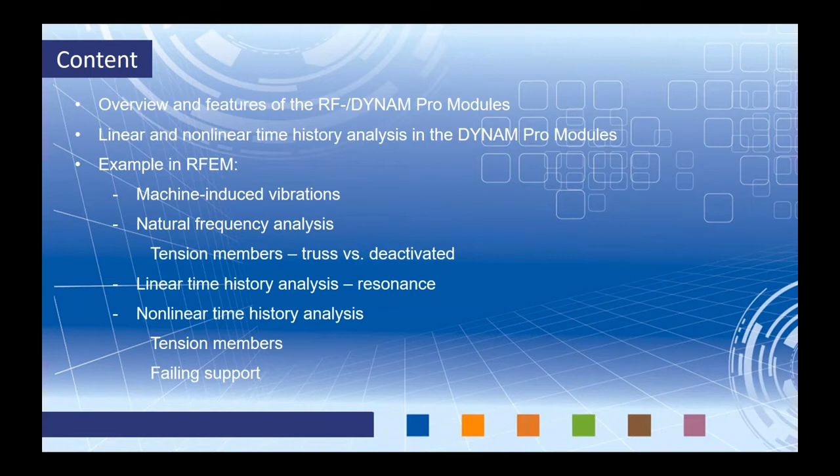So regarding the dynamic add-on modules in RFEM, RFEM is our main program. This is where we're going to fully model the structure. We can load it with some various static loading and run an analysis. But anything to do with dynamics, whether that's a natural vibration, forced vibrations, or seismic analysis, does require one of our dynamic add-on modules. So the first is RF-DYNAM Pro Natural Vibration.

So this is going to run an eigenvalue analysis that allows us to find the natural frequency and mode shapes of our structure. Now this is a prerequisite in order to run any of the additional add-on modules that we have for dynamic analysis. The second is RF-DYNAM Pro Forced Vibrations.

Now this allows us to run a linear time history analysis, which is what we'll be taking a look at today. We can also run a multimodal multi-point response spectrum analysis. We won't be touching on this point today, however.

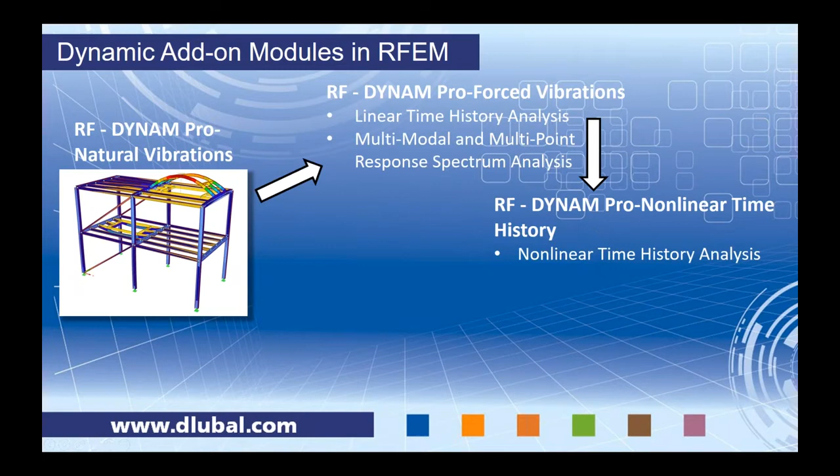We only see tension forces within that member. So what happens is when we have any type of compression within the member, it completely fails. And yet when we reintroduce tension forces within the same member, the member is reactivated, and so on throughout the entire course of the time analysis.

The last module that we have is RF-DYNAM Pro Equivalent Loads. This is a multimodal response spectrum analysis with the generation of equivalent static forces. Now, I did an entire webinar focused on only this module, so I would refer you to our YouTube channel if you're more interested to see this, as we won't have time to get into it today.

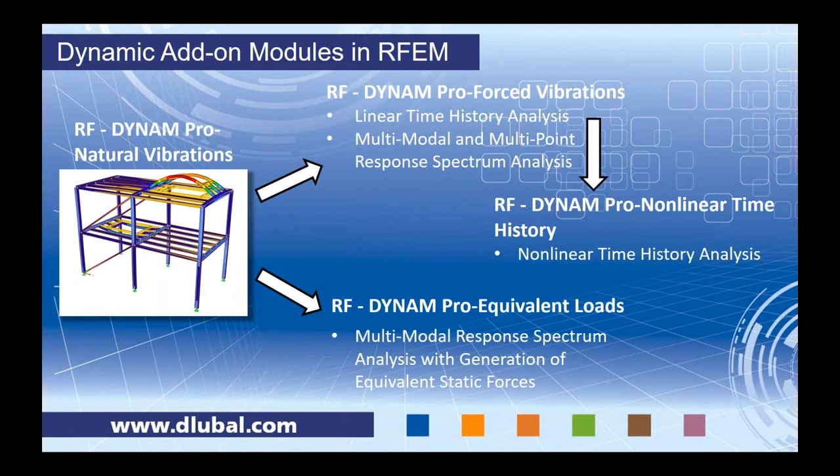So now looking at RF-DYNAM Pro natural vibrations in a little bit more detail. Again, this is an eigenvalue analysis that allows us to view the frequency and mode shapes of our structure. We can directly import masses from load cases, load combinations from RFEM, or we can manually apply masses within the module itself, and eventually we want to create mass combinations. We do have the diagonal, consistent, or unit mass matrix available here.

And again, this is a linear analysis, so something like a tension-only member is replaced with a truss member. Now, there's some other nonlinearities that may be simply ignored as well, such as a failing support. However, we can import initial conditions such as stiffness modifications, axial forces, failing or deactivated members, and that's actually what we'll be taking a look at today. We'll import the failed tension members of our structure to see how the frequency and mode shapes change due to those deactivations.

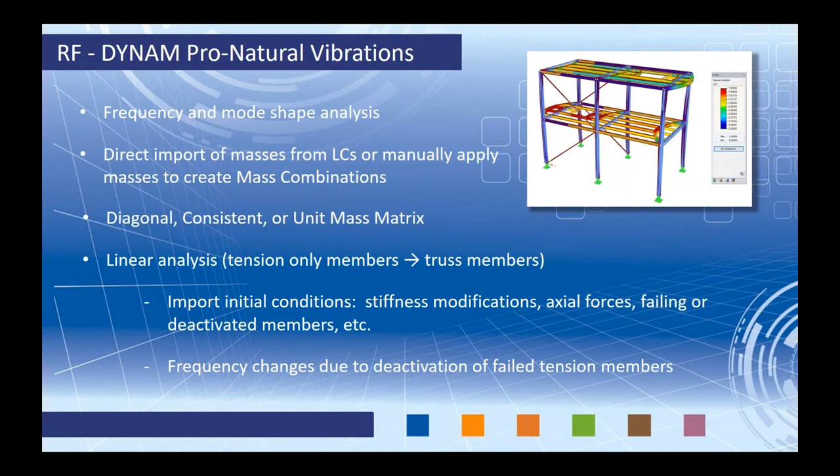So as I mentioned before, with time history analysis, we have both the linear and nonlinear options available. Now, as far as the linear time history analysis, this is available in DYNAM Pro Forced Vibrations. We have two different solvers, the modal analysis solver and the implicit Newmark solver. I'll get much more into detail on these solvers in just a minute, but as an overview, the linear analysis neglects structural and geometric nonlinearities. This does run a first order analysis and assumes small deformations.

Now, again, nonlinearities in the model are replaced, as I've already mentioned, with tension-only members, but also with compression-only members, with cables. They're all replaced by truss members. And by the way, a truss member in RFEM is nothing more than a typical beam element that can take both tension and compression, where all we've done is release the moment releases. Now, other nonlinearities may be completely ignored, such as support conditions.

As far as the nonlinear analysis, this is available with the module extension RF-DYNAM Pro Nonlinear Time History. So there are two solvers available here as well, the Explicit Solver and the Implicit Newmark Solver. In RFEM, this is going to assume large deformation analysis, and all nonlinearities that are defined within the model that we define within RFEM can be considered within the time history analysis.

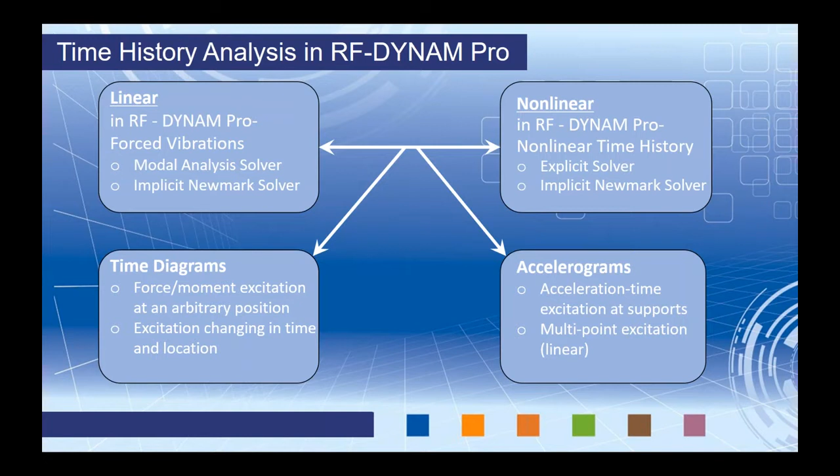So with time diagrams, this is a force or moment excitation at an arbitrary position. We define our time diagrams with tabulated values, which can be imported in directly from Microsoft Excel, for example. It can be a periodic function, or it can be a direct input of a function within the edit field. Load cases define the location and the excitation of how this load will be applied according to the time diagram. So for example, we would apply loads within these load cases, nodal loads, member loads, surface loads, and many other options to determine where exactly this excitation will take place. The combination of several independent excitations is possible, and the excitation can also vary over time and position.

Now, as far as accelerograms, this can be taken into consideration with time diagrams that can be imported in from a library of earthquake recordings, which we have available directly within the module, or it can be user-defined. Now, the difference here is that this is an excitation at the supports. A multi-point option is available as well for the linear analysis only.

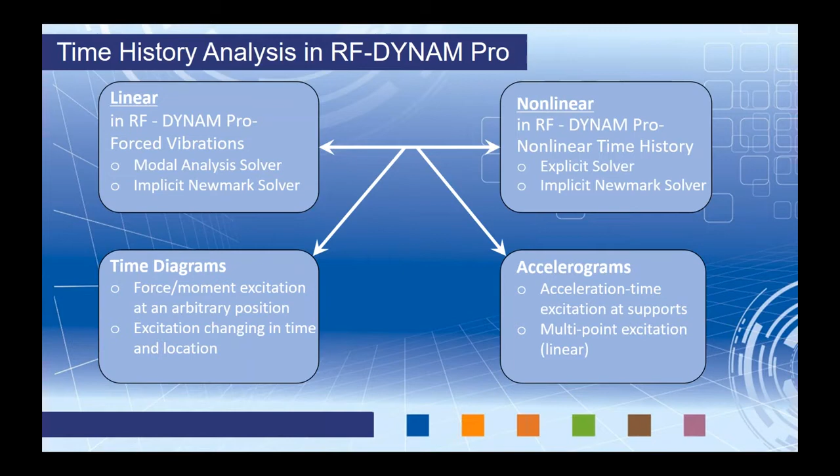Now, regardless if you're running a time diagram or an accelerogram, the display of results are both available on a time course monitor, and this is certainly something that we'll be taking a look at quite a bit today. We can export the results into load cases for single time steps, so you can actually see the response of your structure at each individual time step back in RFEM, or we can export out a result combination for the result envelope.

So to give you a little bit more detail on the solvers, we'll begin with the first linear solver, which is the modal analysis. This is a decoupled system based on the natural vibration case. Therefore, a certain number of eigenvalues are required to ensure accuracy. So if you determine this natural vibration case, if you set the eigenvalues to something that's far too low, then your results are not going to be accurate when it comes to the time history analysis utilizing the modal analysis solver. This is a multi-degree of freedom system transformed into many single degree of freedom systems. We have more information on this in our manual, in our literature, and some verification problems available on our website if you're interested to see exactly how this works.

The mass matrix and stiffness modification are taken directly from the natural vibration case. Now we can consider structural damping, and in particular Lehr's damping.

Lehr's damping, as engineers, we're probably most familiar with this. This is just a damping ratio that we'd like to achieve for our structure. Now you can set different Lehr's damping values for the different eigenvalues from the natural vibration case.

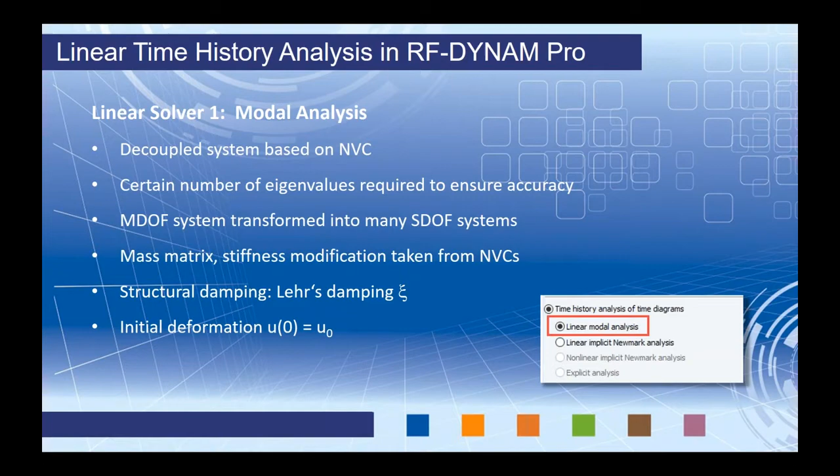And unlike any of the other solvers that we'll be taking a look at today, you also can define an initial deformation.

The second linear solver is the implicit Newmark solver. This is a direct time step integration, therefore eigenvalues are not even required. There's absolutely no assignment of the natural vibration case. You don't even have to run a natural vibration analysis in order to move forward with this particular solver.

In turn, that means that the time step is now incredibly important for the accuracy of the results. If you set a time step that is much too large, then your results from this linear analysis will be incorrect. Now, there is a fine line. If you're setting a time step that's really, really small, well, that's going to take quite a while to solve within the program, when in reality your results might not change much if you were to set something slightly larger.

So we do have some recommendations as far as a time step within the program, and you can see that listed here. Delta t is less than or equal to 1 over 20 times the frequency. Now, the frequency in this equation is the largest frequency from either the natural vibration of the structure or of the excitation frequency.

Both the diagonal and consistent mass matrix are available here, and stiffness modifications or initial deformations cannot be considered. We can also consider structural damping though, however this is in reference to the Rayleigh coefficients with alpha and beta. So we need to somehow convert Lehr's damping into the Rayleigh coefficients, which we'll be taking a look at today with our example.

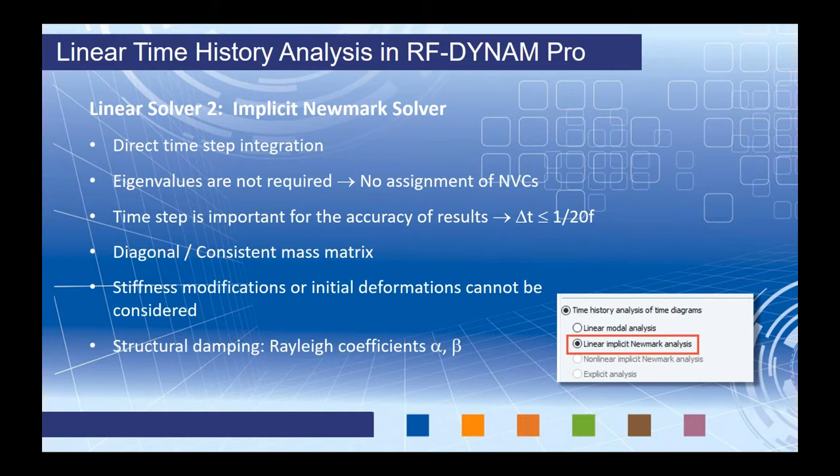So now moving on to nonlinear time history analysis. Again, this is something new that we just recently added. And now we have the ability to define two different solvers to utilize, either the explicit analysis or nonlinear implicit Newmark analysis. Well, with either one of these solvers, nonlinearities within RFEM are now considered.

So the question might be, well, what exactly are these nonlinearities that we can consider from RFEM? Well, here is a nice screenshot showing you the global settings within RFEM where you can activate or deactivate some of those nonlinearities. So as I already mentioned, the member type, tension only, compression only cables, but we also have support nonlinearities. We have member end releases that we can define nonlinearities such as tearing, yielding, friction, things like that.

We also have contact solids and member material nonlinearity, so a plastic analysis for steel, isotropic thermal elastic material models. This can all now be considered with a time history analysis. So the large strain deformation analysis is assumed here, and the direct time step integration is utilized. Therefore, eigenvalues and natural vibration cases are not considered. So again, we don't even have to run a natural vibration case.

However, it's always important to study your structure in order to determine if resonance is going to be an issue. So in our example today, we'll still move forward with a natural vibration case as well.

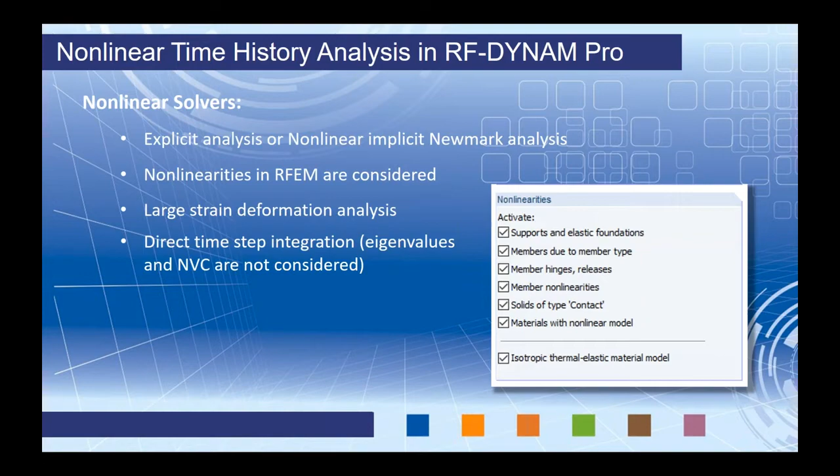Looking at the first nonlinear solver in a little bit more detail, well, this is an explicit analysis solver. This is best for short duration excitations such as an impulse, an explosion, or rapidly changing nonlinearities. Now, in order to get a conditionally stable model, your time step, delta t, must be less than or equal to delta t stable.

Well, the question is, what is delta T stable? And you can see here that I've actually listed this formula here. Now, the program can automatically determine what delta T stable is, so by all means you can use the automatic time step within the explicit analysis solver. The equation is 2 over omega max plus the square root involving Lehr's damping ratios.

Now, remember that I said with either one of these solvers, you do not need a natural vibration case. So without the natural vibration analysis, how do we determine what omega max is? Well, we don't. In practice, delta T stable will be utilized as this equation here, LE over C sub D, where LE is our finite element length, C sub D is the square root of Young's modulus over the density, or the dilation wave speed for linear elastic material. So this is how we estimate what delta T stable will be without the natural vibration analysis.

Now, the diagonal mass matrix is only available here with the explicit analysis. We can consider structural damping here with Rayleigh coefficients, but the limitation is only the alpha coefficient can be set. The beta is always equal to 0 when we're utilizing an explicit analysis.

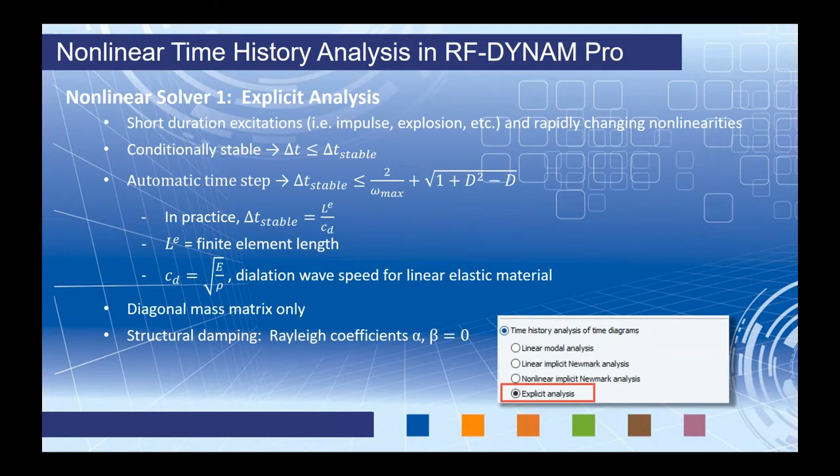The second nonlinear solver is nonlinear implicit Newmark analysis. This provides an unconditionally stable model or analysis independent of the time step. So unlike the previous solver, we'll always get a stable analysis.

However, the time step determines the accuracy of the results. If you're setting a time step that is much too large, your results are going to be inaccurate. So a time step convergence study should be run to determine, as we continue to decrease these time steps, are my results significantly changing?

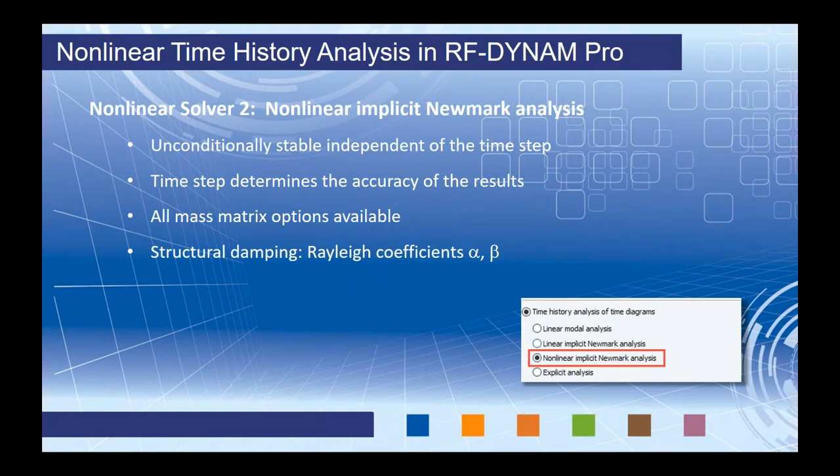All mass matrix options are available with this solver, and structural damping can be considered with the Rayleigh coefficients, both alpha and beta. Okay, so that is all for the theory to begin with. So let's jump into the model.

As you can see here, I went ahead for the sake of time and modeled a steel structure. We have some W8 by 35s for our columns, W8 by 15s for our beams, and you'll notice that I have lateral bracing members here.

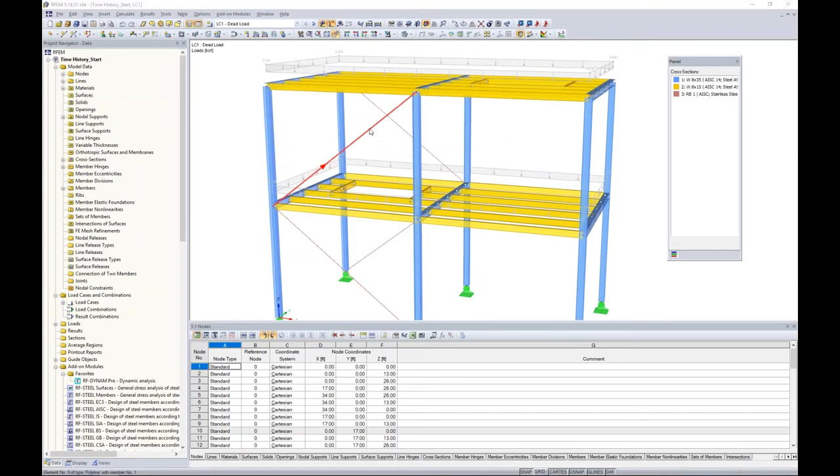Well, these are my tension-only members. I can double-click here and see the member type is set to tension only, and again, we have some other nonlinearities like compression, cable members, and so forth.

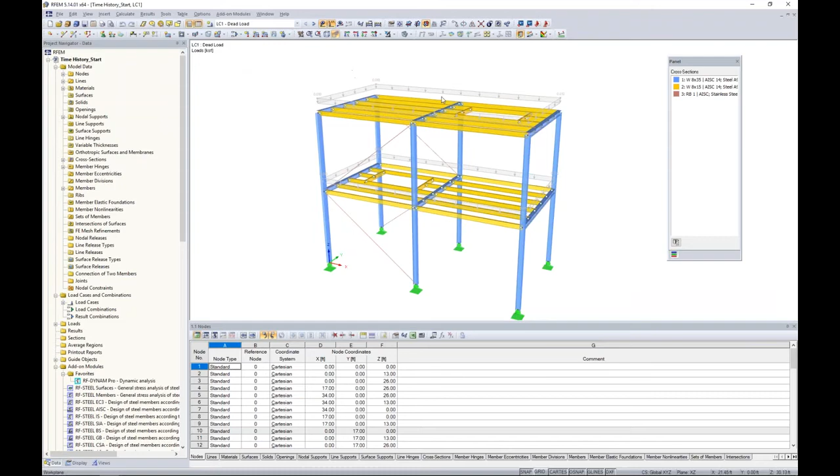I have added a few load cases in here. Now, the first load case is dead load. This is just within our main program, RFEM, and this dead load includes self-weight already, and I've applied a couple area loads. Now, I can right-click to display these area loads separately.

What you can see here is I've excluded some of the transverse beams. They're only applied to members in the global X direction based on their tributary area. So just a typical dead load.

Now, my second load case is the dead load from my machines. This is some type of industrial structure, and we know that there's going to be a couple machines placed on the structure around where these openings are located. Now, these machines inevitably have a dead load themselves, so we need to apply that weight or that force to the RFEM model.

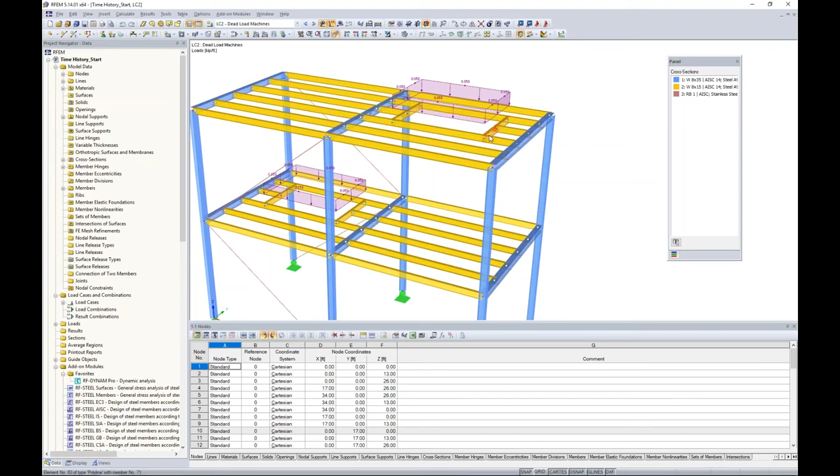So all I've done is I've taken the total weight of the machines, the mass, and then I've divided by the total length here around the opening, which is about 33 feet, in order to get a member load for both the top level and the second level.

So those are really the only two load cases I want to consider for now for my natural vibration analysis. In reality, we could continue on adding snow loads, live loads, and so forth, but we'll just go ahead and move forward with our two dead loads.

So now we want to launch the RF-DYNAM Pro modules. We can access the DYNAM Pro modules in the project navigator over here, and you can see here is our very long list of add-on modules. We can also access them with the drop-down box up here at the top under add-on modules. They're categorized a little bit more clear.

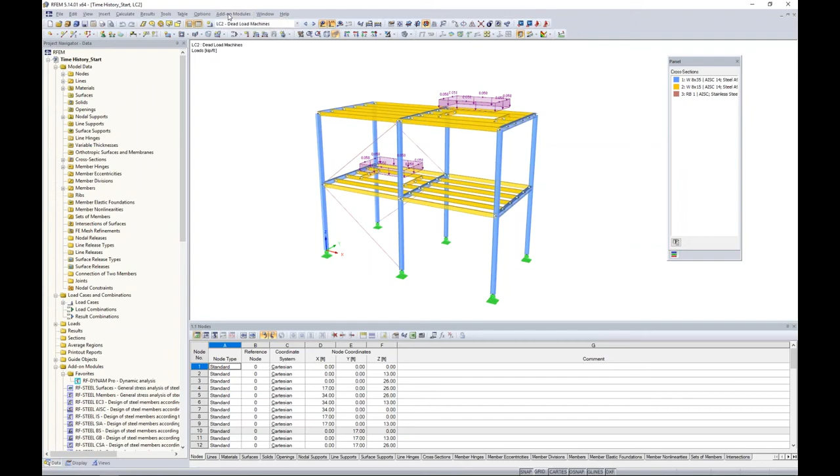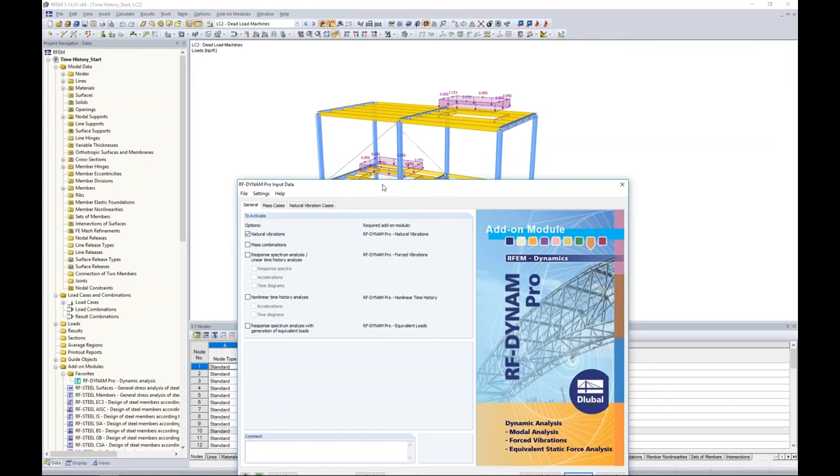So launching RF-DYNAM Pro dynamic analysis, as you can see, all 4 of our DYNAM modules are all located within this single dialog box. Now, we don't have to worry about remodeling any of our members, our materials, our loads, our support conditions. Everything is taken into this dialog box. All that we're doing is specifying a little bit more input that relates to the dynamic analysis alone.

So we can activate or deactivate any one of the modules here. I'm going to leave the natural vibrations activated for now, and I'm also going to activate the mass combinations, which brings up an additional tab. Then I just simply work from left to right.

So my mass cases. I want to create my first mass case, and we'll call this one dead load of the structure. I want to import the masses, but the first thing I want to do is uncheck the self-weight. If I leave the self-weight checked here, I will account for self-weight twice because I've already accounted for it in my first load case back in RFEM. Instead, I'm going to import in that first load case with the area load and the self-weight already considered.

Now, we can manually define additional masses at nodes, lines, members, or surfaces if we had them defined in the model here. So it doesn't necessarily always have to be from a load case or load combination within RFEM.

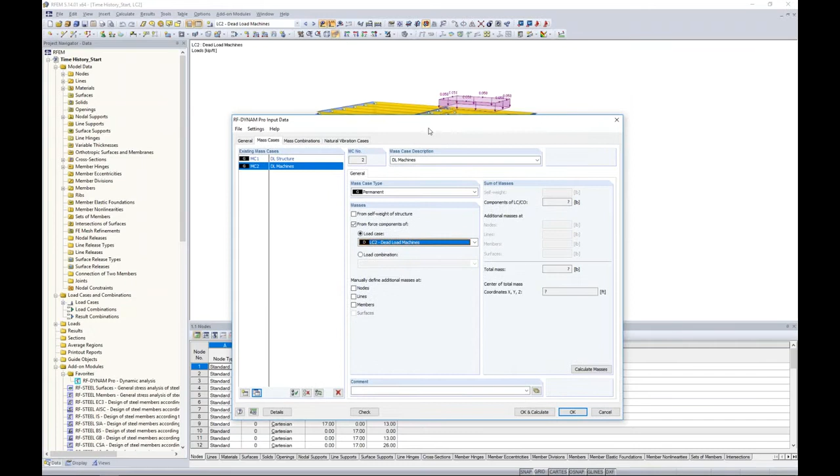So I can make a copy of this mass case, and this time we'll rename it to the dead load of the machines, and we'll import from our second load case the dead load of the machines, which we can see here in the background in RFEM. That's all I want to do for defining my mass cases.

Moving on to mass combinations, this is where I'm going to combine my mass cases to create my first mass combination. You can create as many combinations here as you'd like. This is nice so that if we want to study how the structure behaves based on one mass combination versus another, deactivating or activating other masses, you can do so by creating multiple mass combinations down here. The mass case factor can be adjusted here—right now it's set at 1, or 100% of that mass acting. You can always manually type that in or use the drop down. We only want one mass combination for our case today, so we'll continue to move on.

Now the natural vibration case. The first case, remember from the PowerPoint, I said we're going to run two different cases. The first is where these tension-only members are going to be replaced by a truss member. So we would like to set the lowest number of eigenvalues to calculate to 10. The scaling of mode shapes we'll leave as the default option here.

Under the calculation parameters, well, we just created this mass combination, so we certainly want to utilize it. The type of mass matrix—you can see here the diagonal, the consistent, or unit are all available. We'll utilize the diagonal matrix in translation and rotation, so now you can see all 6 degrees of freedom are activated here.

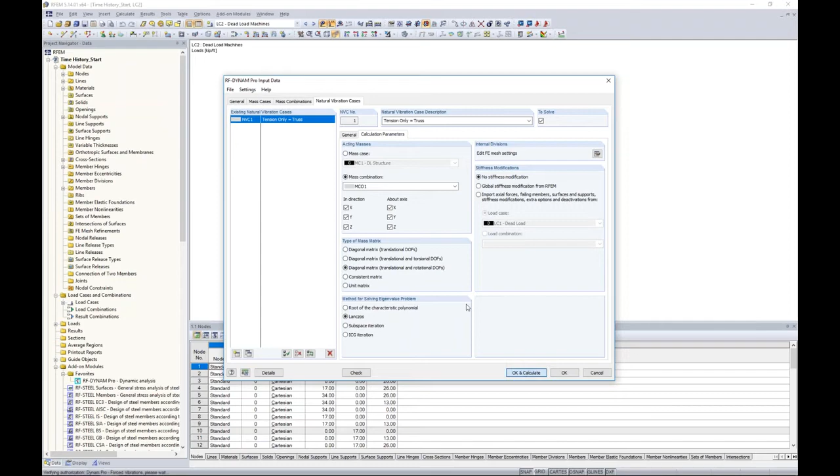So the program will quickly cycle through this. It will dump us back into RFEM. Now realistically we're still in this add-on module—you can see it within my drop-down box here, RF-DYNAM Pro. I'm just viewing my dynamic results graphically and within this table back in RFEM.

According to my table here, table number 5, these are my dynamic results. I can see my natural vibration case is set to the table right now, and I have my 10 different mode shapes. So I can cycle through these mode shapes to view how the structure is behaving based on the different eigenvalue modes. Now, probably the most important table that we immediately want to jump to is the effective modal mass factors. This is going to show me my mass participation in the global X, Y, and Z directions, and it's also going to tell me what my dominant modes are.

So if we take a look at mode shape number 1, this looks to be the dominant mode shape in the Y direction—I have the most mass participation at 64% here. Moving on down the table, it looks like mode shape number 6, with 86% mass participation in the global X direction, would be my other dominant mode.

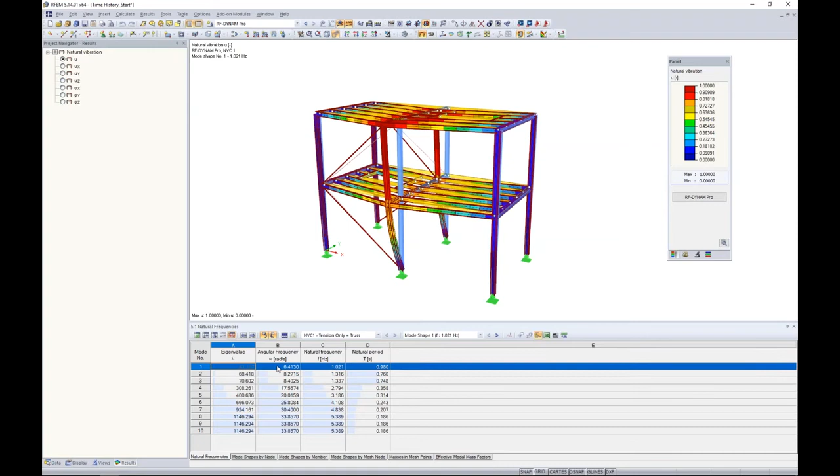With those two dominant modes in mind, we're going to jump back to the natural frequencies tab here to take a look at what the angular frequency and natural frequency are. According to mode shape number 1, angular frequency 6.4, natural frequency 1.02. Moving a little further down to mode shape 6, the angular frequency is 25.8, the natural frequency is 4.1. These are two really important numbers I want you to keep in mind: 25.8 and 4.1.

So this is the natural frequency analysis of my structure. I know that I'm going to be placing these machines on this structure—they're going to be rotating, inducing some external excitations onto the structure, and they also will have an angular frequency and frequency in hertz that will be applied to the structure. So the question is, do we need to worry about resonance? What is the frequency of these machines? Do they coincide with the frequency of my structure? Am I going to get deflections that ultimately may cause the structure to fail because those two frequencies are so close together? That probably tells us that we want to run a time history analysis.

So here, back to the PowerPoint, let's take a look at some calculations for these machine-induced vibrations.

So I was given the information that I have 2 rotating machines at 246 rotations per minute. The mass of the machines is 2,000 pounds. Of that, the mass of the rotors is 700 pounds, operating at an eccentricity of 0.75 inches.

In order to find the excitation frequency, all we need to do is take 246 rotations per minute divided by 60 seconds, and we get 4.1 hertz. The angular frequency is 2 pi times the excitation frequency, which gives us 25.76.

Now, remember back to my natural vibration analysis, mode shape 6, we remember frequencies that line up almost identical to these two of our machines. So that immediately tells me I could have a serious problem here with my structural design in the case of resonance.

So moving forward with the time history analysis then, I want to turn these frequencies into a centrifugal force. Now, the force is going to be applied to my structure as a static load because this is what's going to tell the program this is the location that my excitation is going to take place that I'll eventually apply to my time history analysis. But we first need to convert these frequencies to an actual force.

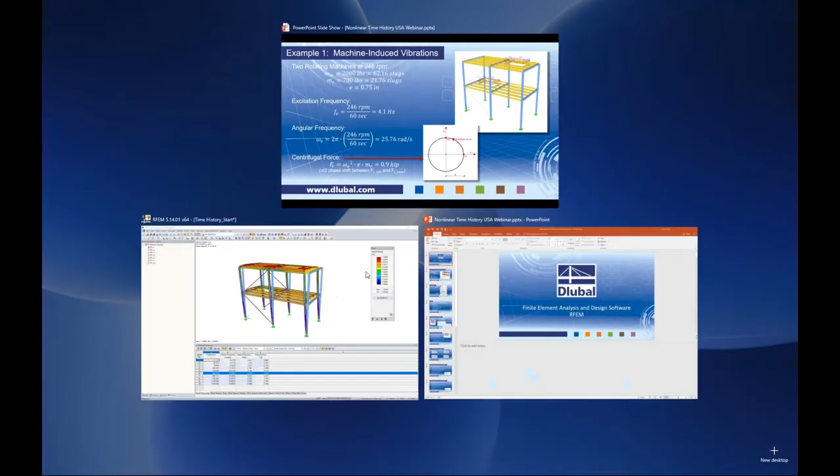So jumping back to the model here, we would like to move forward with our time history analysis. Within RFEM, I've already created a couple different load cases. Here is my centrifugal force in the vertical direction. This is a completely empty load case right now.

So what I'd like to do is take that 0.9 kips and apply it in the vertical direction where these machines will be placed, applying the excitation to our structure. We'll do this with a new member load. I'm going to take the 0.9 kips, divide by the total length here of my opening, which is about 33 feet, to give me my magnitude of negative 0.028 kips per foot. And I want to apply it in the global Z direction.

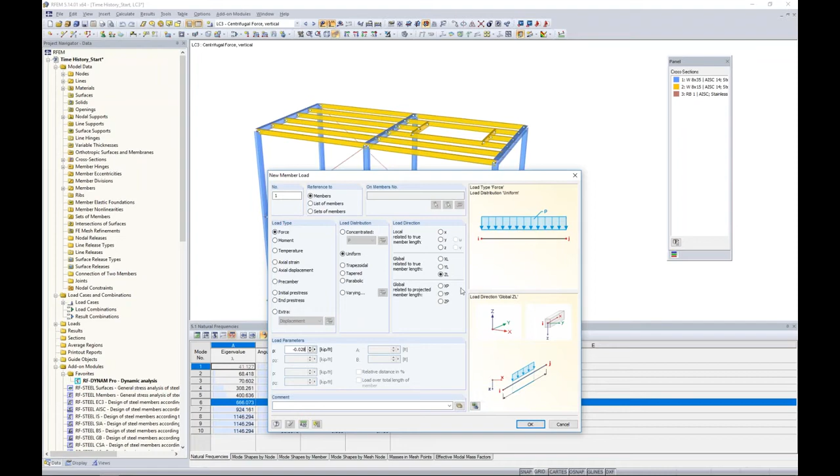I click OK. I can zoom in here and simply click on the members where those machines will be placed, and I have my first vertical load applied. Now I want to do the exact same thing down here on my lower level. I just click at the locations where the second machine will be placed, and I have my second vertical load.

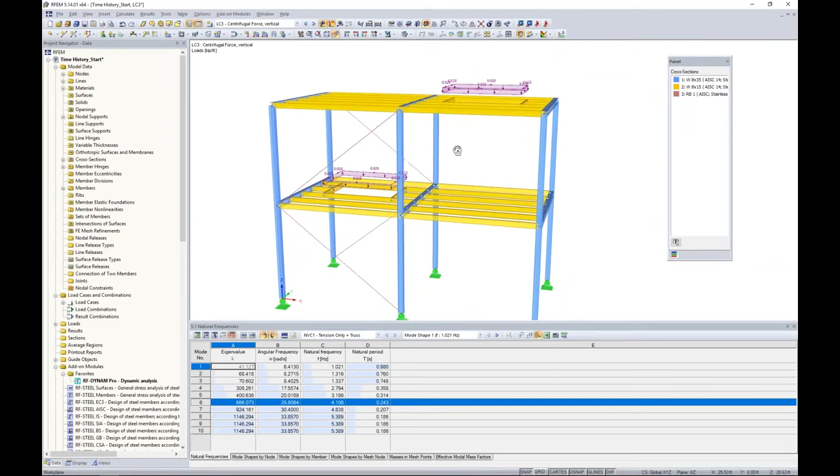So again, we created this fourth load case, the centrifugal force, in the horizontal direction. Exact same concept here. I apply a new member load. I keep the magnitude the same. The only thing I want to change is the load direction in the global X.

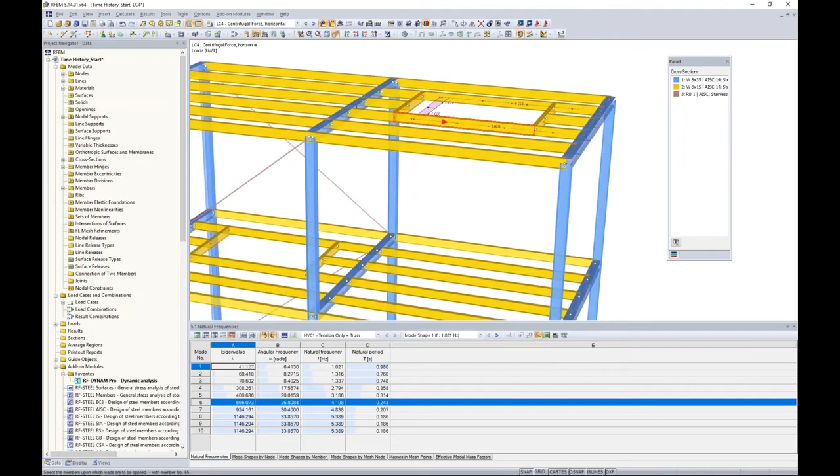I click OK. I zoom in here to where my opening occurs. I click on my members to now create that centrifugal force in the horizontal direction only. I do the same thing on the bottom level to every member that's applied to that opening.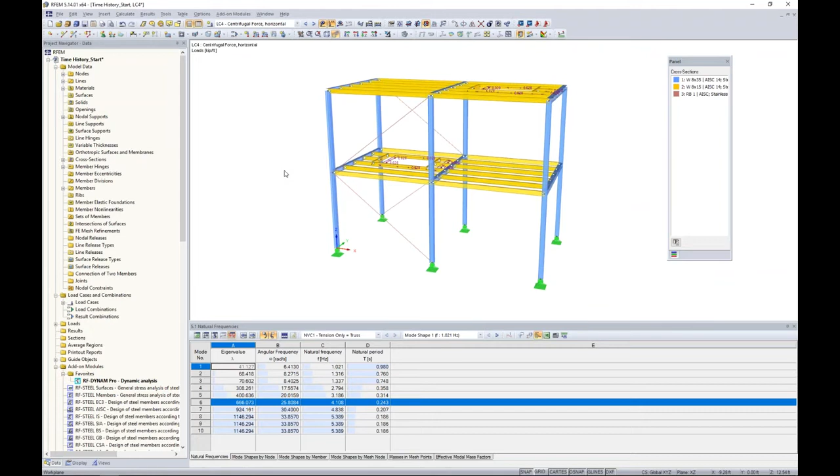So now I just have these basic static loads within RFEM. That's all I've done here, but we actually need to provide some type of time diagrams to tell the program how this force is going to vary over time.

With this, we'll launch the RF-DYNAM Pro module again. So here we can now activate RF-DYNAM Pro forced vibrations for a linear time history analysis according to a time diagram. Now you can see I have a couple different tabs available up here at the top.

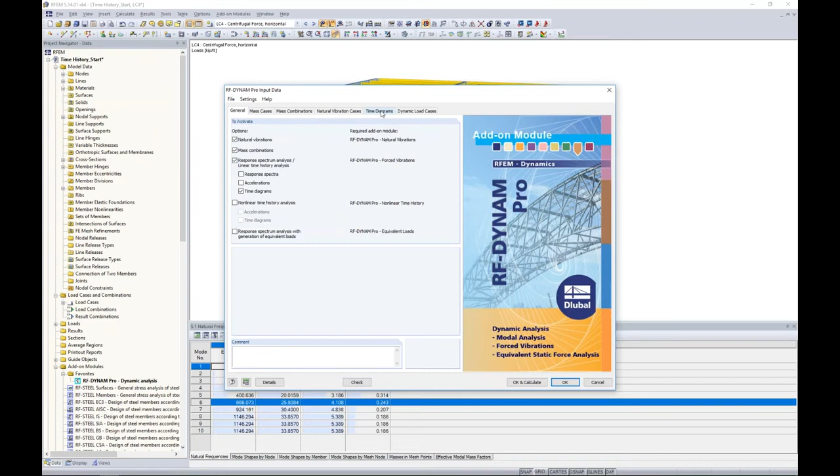So taking a look at our time diagrams, we want to create the first time diagram description, and this will be the vertical component. As I mentioned in the PowerPoint, we can import transient information from Microsoft Excel, for example. We can enter in a periodic function, which we'll be utilizing today, or you can type in a direct function here.

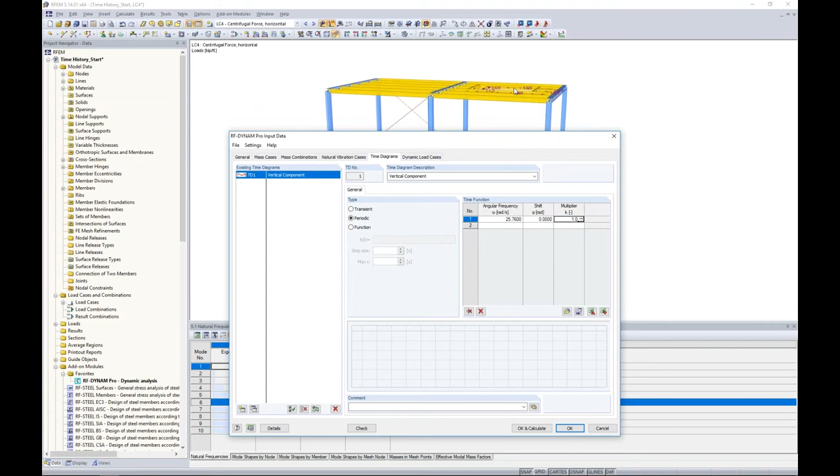As far as the periodic function, remember from the PowerPoint, we already solved for what the angular frequency of our machine is. This is going to be 25.76. The shift is going to be 0. The multiplier is going to be 1.0. Now the multiplier is 1.0 because I've already defined the correct magnitude for my machines back in the load cases within RFEM.

So now I can see here my sine function displayed along my diagram according to these values that I entered in here. Now I'm going to make a copy of the vertical component, and instead we're going to call this one horizontal component. Everything remains the same here. The only thing that we'd like to adjust is the shift. Remember, we have a pi/2 phase shift. In radians, that's 1.57. So now we have a cosine function.

So at time equals 0, this is where we're going to have 100% of that horizontal load acting on the structure. But then we move a little bit later on in time, and about 0.06 seconds, we have 0% of that horizontal force acting. Now, that's in turn to the vertical component. We have 0% at time 0, and at time 0.06 is 100% of the vertical force acting. Now, in between this region, we're going to have some type of relationship where both forces are acting together.

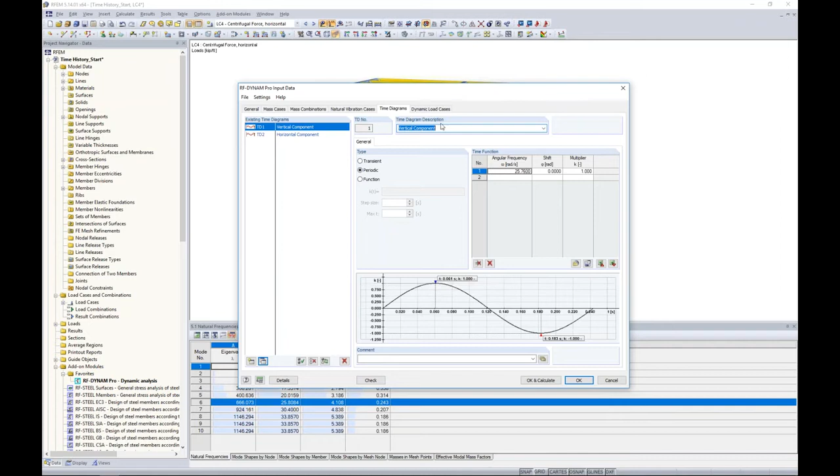Under the dynamic load case, our first load case description here is going to be linear time history. As I have mentioned in detail within the PowerPoint, we have two different solvers here for a linear analysis: linear modal analysis, linear implicit Newmark analysis. We're going to move forward with the Newmark analysis today.

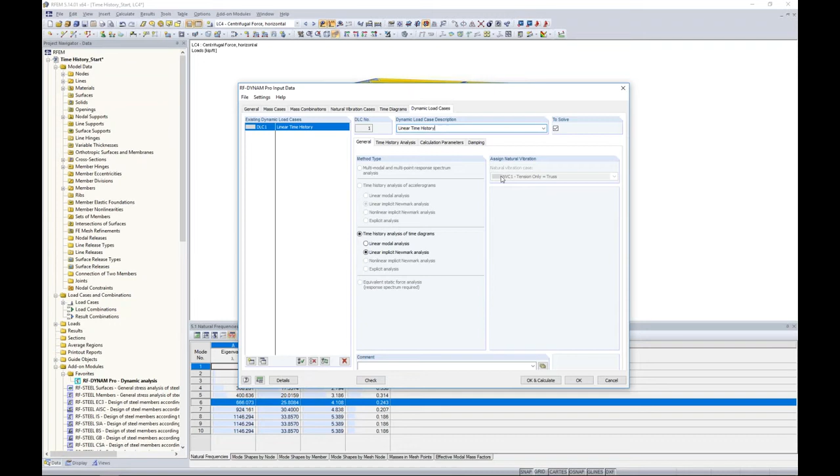As you can see, I cannot select a natural vibration case. This is grayed out. That's because a natural vibration case is not required. It's not considered for this type of solver. That's opposed to the linear modal analysis, where we would consider one of our natural vibration cases.

The time history analysis, this is where we need to relate these static loads back in RFEM to our time diagrams, our sine and cosine functions that we just created. So what we're going to do is utilize load case 3 back in RFEM, our centrifugal force in the vertical direction, and that's going to be related to my vertical component. It's as easy as that.

Now we want to do the same thing for the horizontal centrifugal force. Remember that load case 4, which is the one we're displaying here back in RFEM, and we're going to relate it to the time diagram for the horizontal component.

Time steps and maximum time. So the saved time steps, this is just going to be utilized for a couple different things. Number one, it does not matter for the analysis. What this is important for is viewing our results back in RFEM. You can export a single saved time step or multiple saved time steps as load cases back in RFEM if we wanted to.

That is why this value is important here, as well as something like the time course monitor. We want to have a nice smooth time course monitor, so I might set this at something like 0.01 seconds. The maximum time is what I'm going to consider for this full time history analysis at 30 seconds.

Now here's time steps for calculation, and this is a part that's really, really important. For a linear Newmark solver, I do not suggest using the automatic feature. There are additional solvers when we get into nonlinear analysis, as I mentioned, where the automatic is fine to use. But for the Newmark, you most likely need to set this manually.

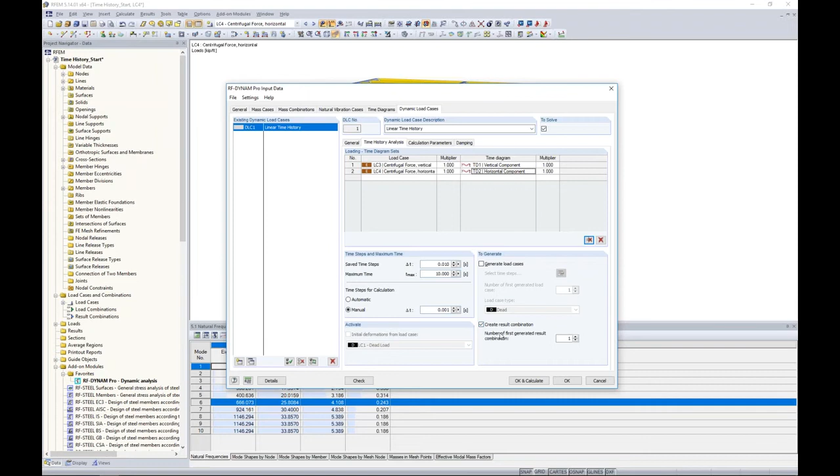We can create a result combination here, as I mentioned, so this will just give us an envelope solution for all of our time steps considered.

The calculation parameters. Here is where we want to activate the mass combination that we previously created. And the mass matrix, again, we have both diagonal and consistent available here. We'll utilize the diagonal matrix for translation and rotation.

And finally, damping consideration. As I mentioned, with this solver, Lehr's damping cannot be considered. Instead, we have to convert that to Rayleigh damping. As engineers, we're probably most familiar with Lehr's damping and those damping ratios.

For example, today's structure, I'd like to set the damping at 1% for this steel structure. Concrete might be something more like 5%. So the question is, how do we convert this Lehr's damping that we're also familiar with into Rayleigh damping? Well, it's actually quite simple.

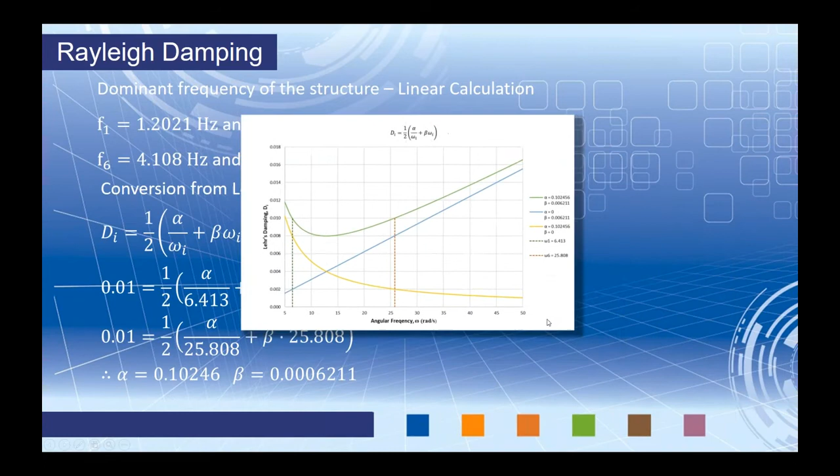Now I want to point out this graph in a little more detail because I find it somewhat interesting. This is what you'll find in a lot of literature that goes into detail about dynamic analysis and damping considerations. This is actually our Rayleigh damping plotted on a graph for our structure today. Lehr's damping is on the vertical axis, and on the horizontal axis we have the angular frequency. The green line here is Rayleigh damping - it's this actual formula plotted out with my alpha and beta values that I solved for today. The whole point of Rayleigh damping is to show you that damping is different for each frequency, so that's why we have somewhat of a curve here.

Now there are several other lines here on this graph. The dotted lines indicate my dominant mode shape. Here is mode shape number 1, the dark green line - we can see omega 1 here. And then the orange dotted line is omega 6, my dominant mode shape 6. I've adjusted alpha and beta so that if we follow these dotted lines where they intersect with the Rayleigh coefficients, we get 0.01 Lehr's damping.

We also have the yellow line, where I've set beta equal to 0 but my alpha coefficient is still considered. The whole point of this is that mass and stiffness damping considerations affect the overall damping ratio - there's two components, the mass and the stiffness. When we set beta equal to 0 for this yellow line, we're only considering the mass proportional damping effect. This blue line is where I've set alpha equal to 0 but kept my beta coefficient - this is the stiffness proportional damping effect. When we consider both alpha and beta, this is a combined mass and stiffness damping consideration.

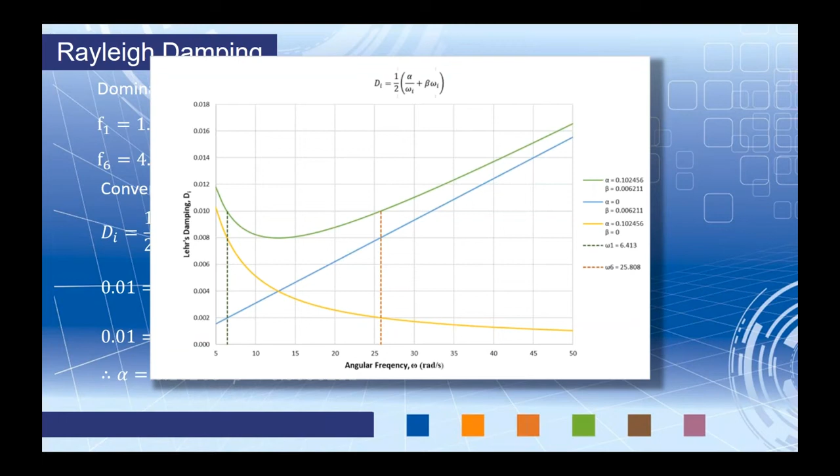One other thing I wanted to mention: for our particular structure today, for any angular frequencies within this range between our dominant modes, the structure would technically be considered underdamped. For any angular frequencies outside of this range, more so in this area up here or slightly over here, that's where our structure is considered overdamped. Just interesting to see Rayleigh coefficients and damping considerations plotted here for our structure.

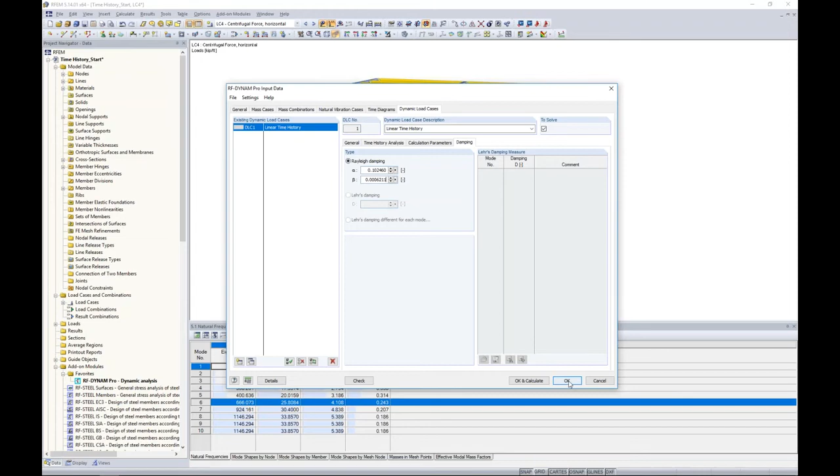Okay, jumping back to RFEM, remember we solved for alpha and beta, so we want to type in those values now: alpha at 0.10246, and beta is equal to 0.0006211. Now we're ready to run our calculation. So I click OK and calculate, and for the sake of time I'm just going to jump to an already saved model here. It doesn't really take that long, but we'll just go ahead and jump to this already saved model, and immediately we're brought back into RFEM.

We're still within the RF-DYNAM Pro module, but we're just viewing our results graphically. Now in our dropdown, we have our natural vibration case, but we also have our dynamic load case for linear time history that we've solved for here. We do have some tables available, but I think the most important element in taking a look at what's really going on with our structure and the results is something called the time course monitor.

With our time course monitor, we have this dropdown over here. I can view my members, my nodes, or support nodes. What I'd like to do is choose nodes, and I'm going to zoom in to a node at the front of my structure here.

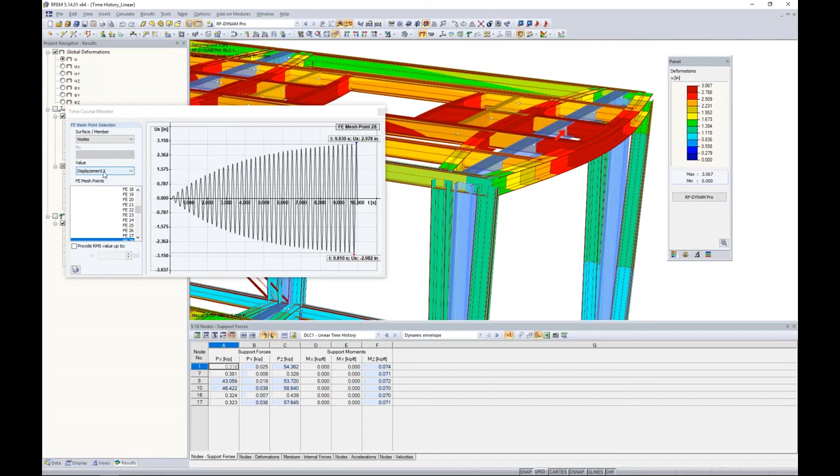I just click it graphically, the program automatically updates, and now I'm viewing the displacements in the X direction for this particular node, which you can see there is a red line indicating which node I'm looking at.

Well, I can take a look at this time course monitor and immediately know I have a huge problem. This is what resonance looks like. This is when our excitation frequency coincides with the natural frequency of our structure and our deflections just grow bigger and bigger. Eventually we're looking at a deflection of 3 inches at the end of our 10 seconds.

So inevitably our structure is going to fail. We can see this apparent in any one of the other values here that we can use in our dropdown. For example, we can view different accelerations and velocities. We can take a look at acceleration in the X direction for this node as well. Again, resonance is very apparent here.

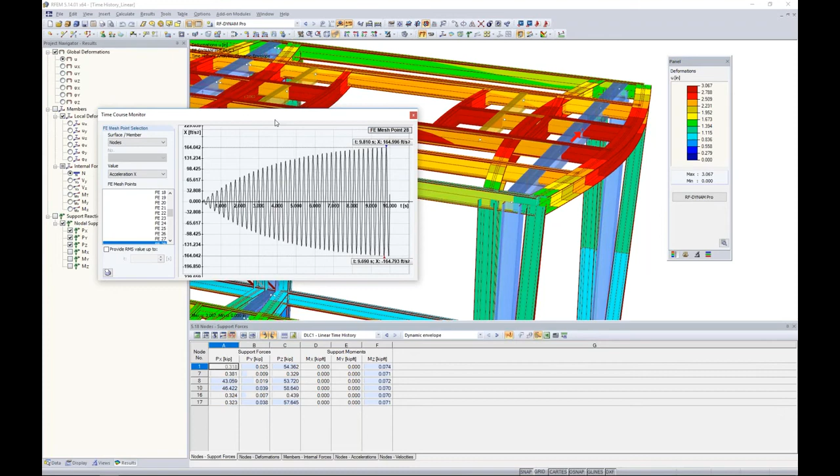Not only that, but remember we had these tension-only members for our lateral bracing in the back. Let's take a look at what the normal forces for this tension-only member look like. So I click on the member graphically, and then I want to take a look at the normal forces within the member. And again, we obviously have resonance. We've already determined that, but this is a tension-only member. I certainly have tension forces here, but I also have compression forces.

Well, this is a cable element. By no means can it take these compression forces, but this is a limitation of a linear analysis. That tension-only member was replaced with a truss member that can take both tension and compression.

So the question is, how could my structure possibly look different in terms of my natural vibrations if I were to account for the failure of these tension-only members? So we want to move on to a second natural vibration analysis study where we deactivate these failed tension members.

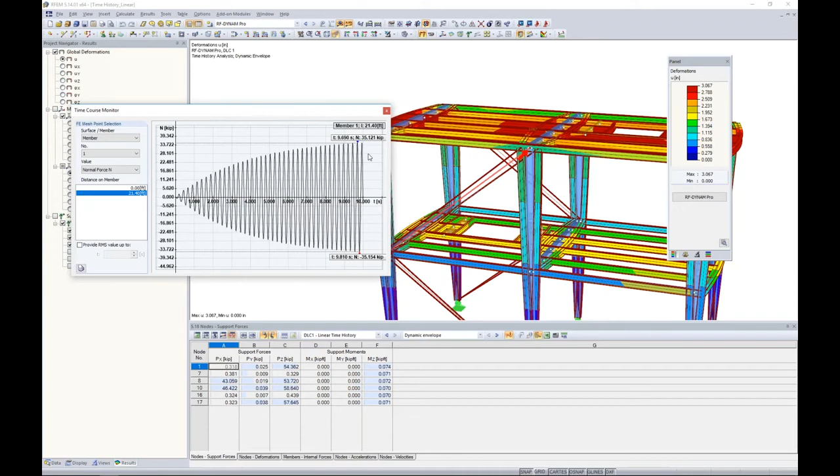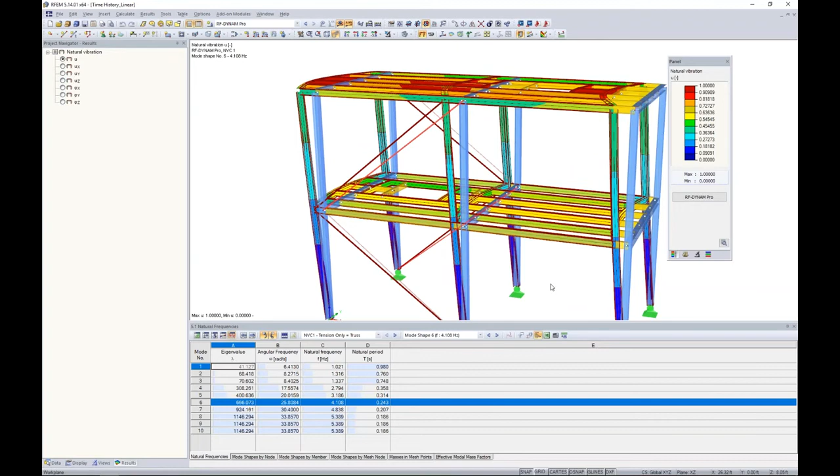So what I'm going to do is jump back to my natural vibration case, which we can easily do with our drop-down box here. Let's go back to mode shape number 6. Remember, this is our dominant mode shape in the X direction. I think it's pretty apparent here that we can agree on which members are failing when our dominant mode looks like this. If we take a look at member number 1 and member number 4, these are the 2 tension-only members that are in compression for this dominant mode shape in the X direction.

So what I'd like to do is completely deactivate them and rerun my natural vibration analysis. How can I do that? Well, back in RFEM, I'm going to create a new load case. Remember, load cases are something I apply my dead loads to, or my centrifugal forces to. For this 5th load case, I'm going to call this one tension-only deactivation. I'm not going to account for self-weight, and I'm not going to apply any loads whatsoever to this load case.

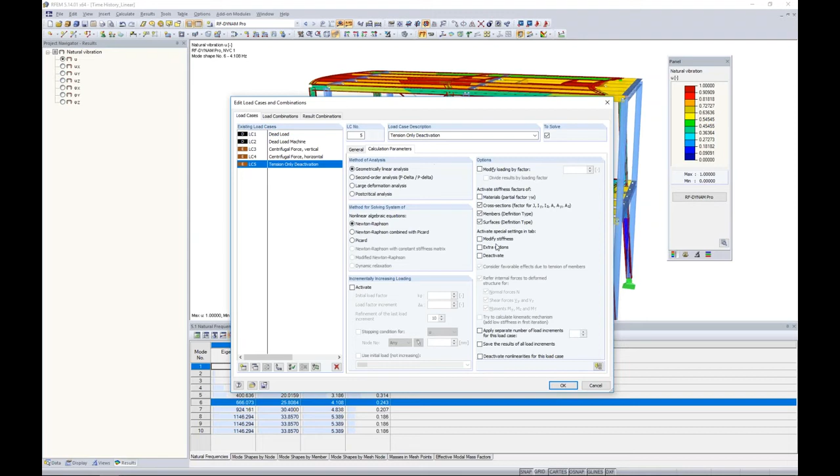What I want to do is, under the calculation parameters, we have a few extra features here, one of them being deactivate. So I now have a deactivate tab available, and I can graphically select those 2 failing tension-only members for this dominant mode shape, members number 1 and 4. I'm going to completely deactivate them for this load case. That's all I want to do.

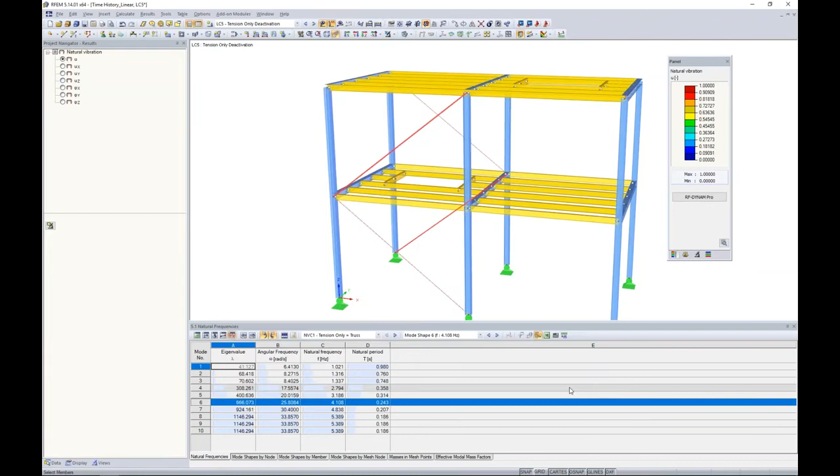So now I'm going to go back to the dynamic module. I can just double click on it over here in my project navigator. Jumping back to my natural vibration case tab, I'm going to make a copy of what we've already previously done. We already created natural vibration case 1. I'm going to create natural vibration case 2 as a copy and rename it to deactivation.

Everything remains the same from my first case, the acting mass combination, the mass matrix, but remember I said we'd get back to the stiffness modifications. This is where we can account for the failing tension-only members, and we can import the deactivated members from load case number 5, tension-only deactivation. Now, it's important that you don't add additional loads to this load case, because the geometric stiffness matrix will be imported in from RFEM and can significantly affect our natural vibration case in a way we don't want it to. So rather, we left this load case empty with only those members 1 and 4 deactivated.

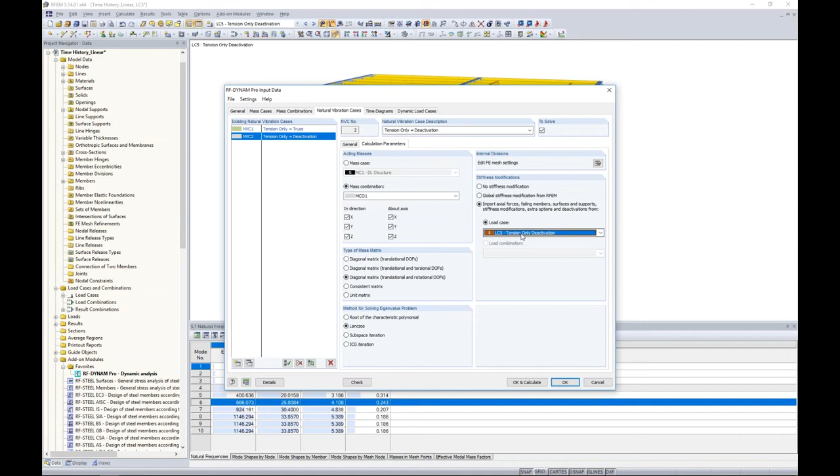So all we need to do now is click OK and calculate. The program will cycle through this.

We'll take a look here at our natural vibration cases for this second load case. Let's take a look at our drop-down. Natural vibration case 2 is now available, and I'm going to jump to the effective modal mass factors.

Mode shape number 1 still remains our dominant mode shape in the Y direction. That's great, I didn't make any changes in the Y direction, so I wouldn't anticipate that dominant mode shape would change whatsoever. But continuing down the table, now it looks like mode shape number 4 is my new dominant mode shape in the X direction at 84%. Remember, it previously was mode shape number 6.

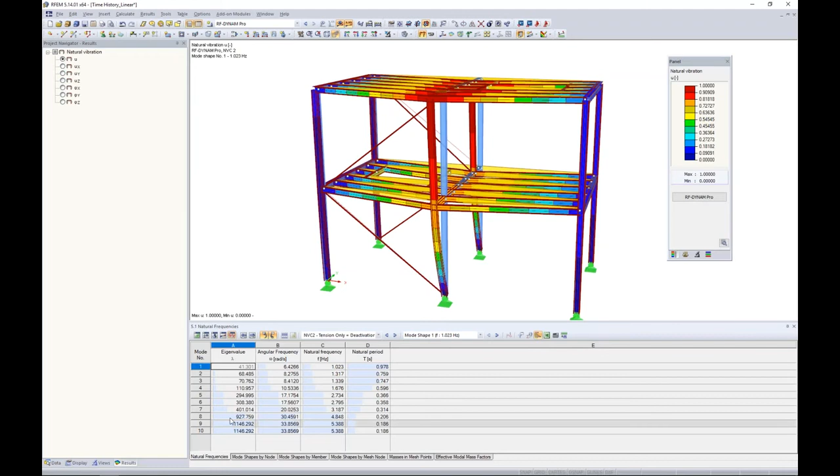So from here we'll jump back to the natural frequencies table. Mode shape number 1 remains unchanged, but our new dominant mode shape, number 4, has an angular frequency of 10.53. The natural frequency is 1.67 hertz, which is less than half of the excitation frequency we're seeing with our machines. So this tells me that maybe resonance actually isn't an issue—it's just the limitation we had with tension-only members, which we had to consider as truss members.

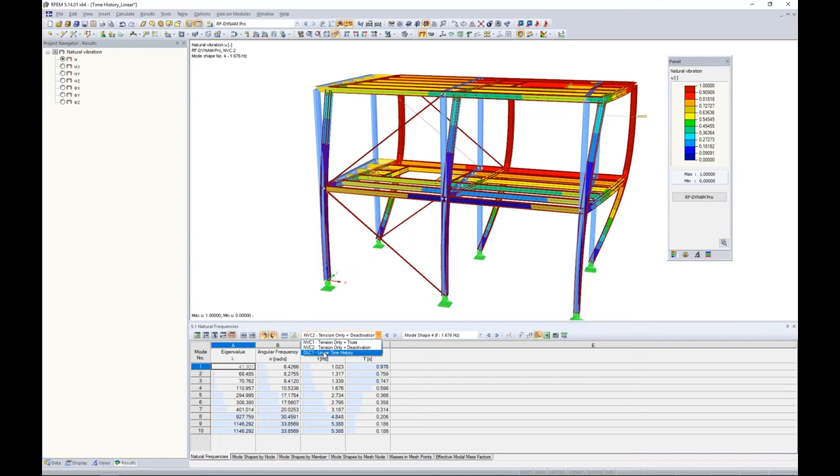So you might think, okay, let's jump back and just do another linear time history analysis, but we can't. If we take a look at dynamic load case 1, linear time history, nothing's changed here. That's because those tension-only members are still being replaced by truss members. We're still going to see resonance because we don't even need a natural vibration case for this particular solver—they're not related whatsoever.

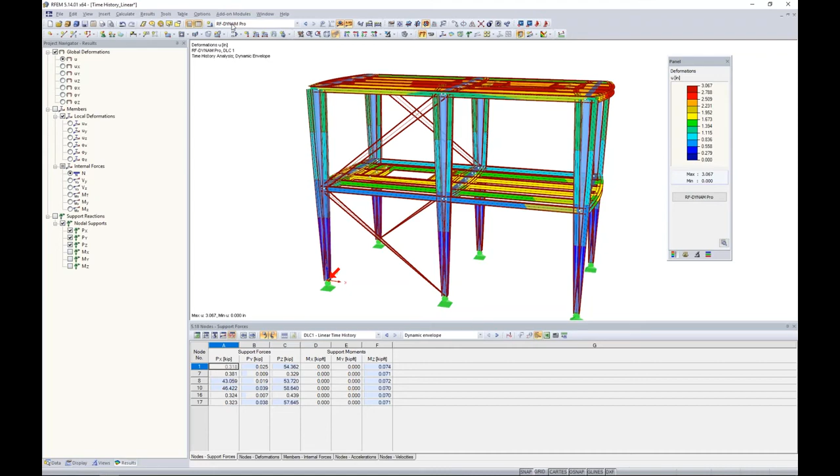So what we need to do is move on to a nonlinear time history analysis. We can access our add-on module again under Add-on Modules, Current Module, and now we're going to activate nonlinear time history with a time diagram. None of my tabs have changed here. The only thing different under the dynamic load case is I have 2 additional solvers available, which we went into in great detail within the PowerPoint.

I'm going to simply make a copy of my linear time history, and all I need to do is rename it nonlinear time history and change the solver type. So for today, we'll utilize the nonlinear implicit Newmark analysis.

The time history analysis here can all be left the same. Now there's maybe the possibility you want to decrease your time steps for calculation, especially with a nonlinear analysis now, so that's something to keep in consideration. For today, I'm going to keep it as 0.001, making the assumption that our structure doesn't change much even if we go to a smaller time step.

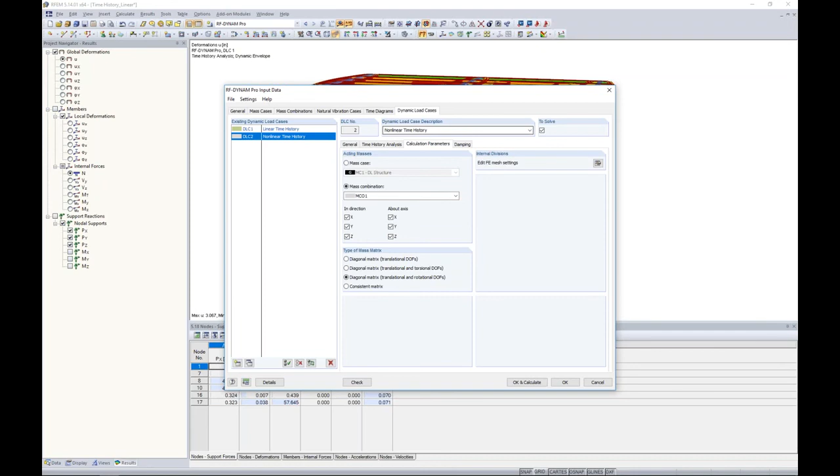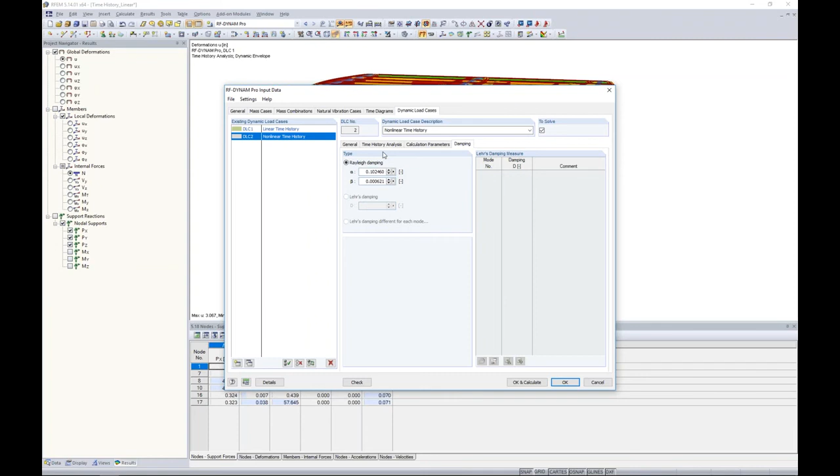Calculation parameters—everything is left the same here as our linear time history, even damping considerations. Now realistically, remember that our dominant mode shapes have changed, so we probably want to go back and reconvert our damping to our Rayleigh damping coefficients, alpha and beta. For this example today, it really doesn't impact our structure too much, so I just left alpha and beta the same. Then we're simply ready to run OK and calculate.

Now, again for the sake of time, I'm going to jump to an already saved model where I've reran the nonlinear time history, and now we can see our results available in RFEM. Under my dropdown I have natural vibration case 1, natural vibration case 2, linear time history, nonlinear time history. So all the previous information I've done with the other cases is still available here, but now we're just focusing on the nonlinear time history.

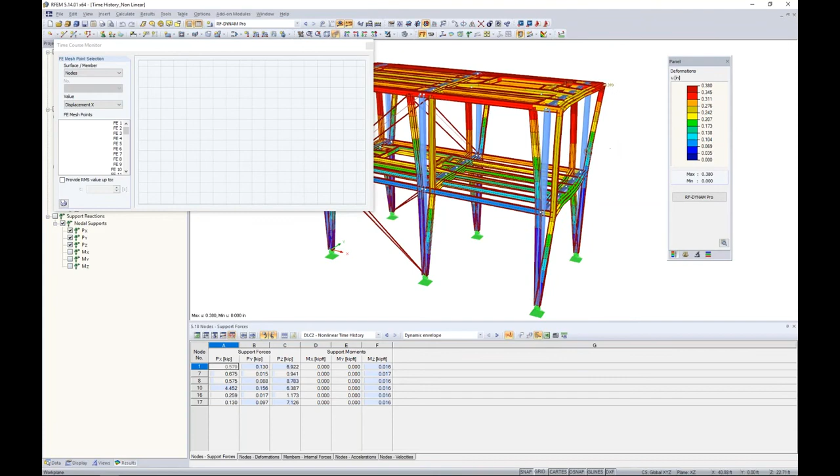Now, as I mentioned before, the time course monitor is most important to take a look at the response of our structure. So let's take a look at the drop-down here, the nodes, and let's zoom into that exact same node we were looking at before. And we're looking at displacements in the X direction.

Now we've made no changes to the structure. All that we're now considering is the nonlinear elements that were defined within RFEM, and you can see that our time course monitor looks much, much different. We no longer have resonance. In fact, we only have a max deflection here of 0.273 inches, at just a short period of time over this 10 seconds. We can also take a look at accelerations, accelerations in the X direction, for example.

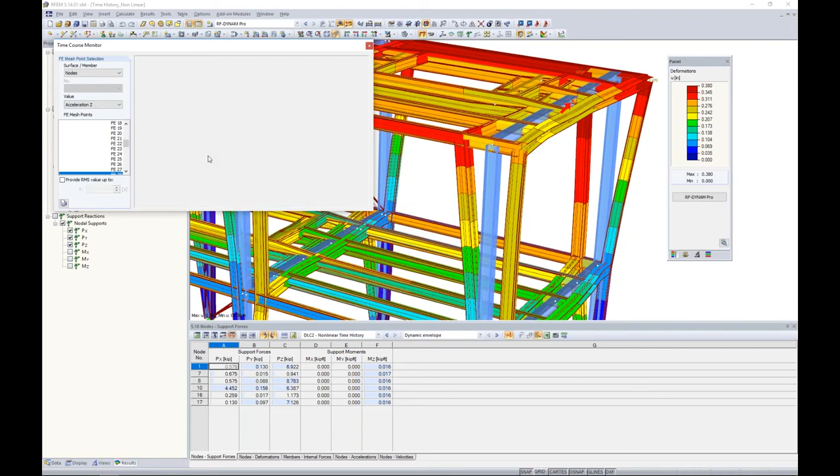Maybe we want to take a look at accelerations in the Z direction. Accelerations are very important for us as structural engineers because this is something that we have limitations on, depending on what this structure is going to be used for.

So for today, this is an industrial structure. We probably won't have too many humans occupying the structure, but if you're designing a hotel or an office where people are sitting or sleeping or whatever else all day long, accelerations that are extremely high can be very unpleasant, intolerable, and it's something that a lot of codes really place limitations on, and they set this usually at less than 10% of G.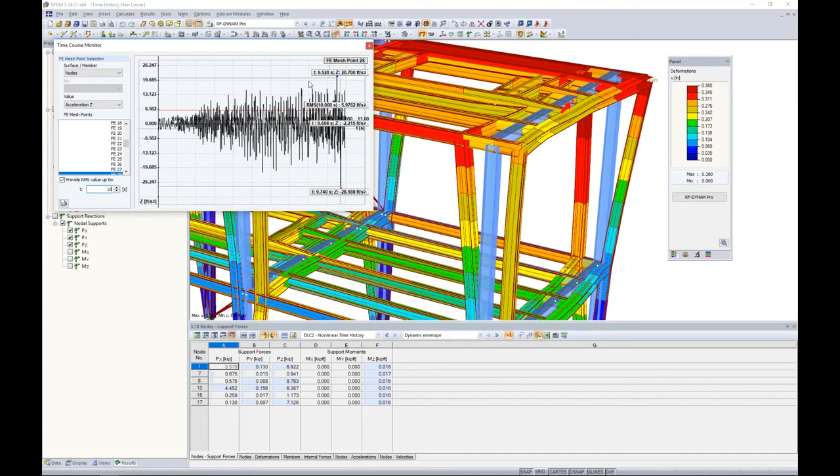So that's how we can view all of this information through the time course monitor. Now let's jump back to our tension only member. So I'm going to graphically select it here, and I'm going to view in my drop down my normal forces for this member. Well, this looks significantly different as well.

You can see here for my tension only member, only tension forces are available. The minute that I have a compression force within this member, it completely fails. Once tension is reintroduced into the member, the element will be brought back into the time history analysis, and that will continue on for the full 10 seconds. So that really summarizes how something like a nonlinearity within RFEM can be accounted for.

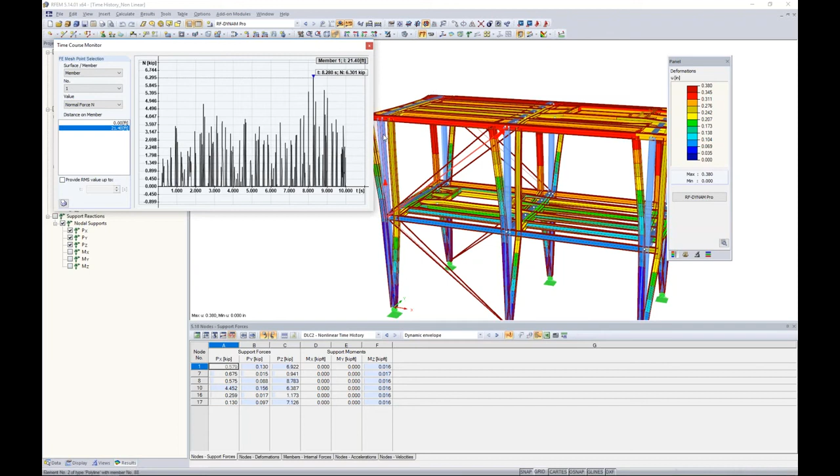I have another quick little example today to showcase other nonlinearities that can be considered with a nonlinear time history. And what I'd like to do is to consider nonlinearity within my supports here. So what I want to do is to take this front center support, and I'm going to double click on it to create a new support type.

Now currently this is just a typical pin type application. You can see here we have our 6 degrees of freedom, 3 in translation, 3 in rotation. Now for my new support that I'm going to create, I'm going to introduce a nonlinearity, and that nonlinearity is going to be failure if positive PZ. Well, Z is my vertical deflection. So if I have any uplift at this support, I want this entire support to fail.

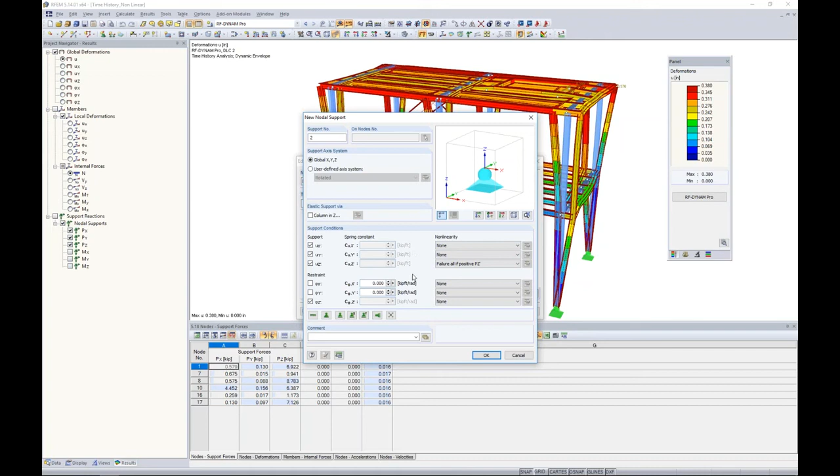Well, this is a nonlinearity, so I click OK for this new definition type. I clear my results and take a look at my model back in RFEM. You'll notice that the rest of the supports are green. This one is now blue. That's the program just indicating that I've applied some type of nonlinearity to this support condition, which is nice to be able to differentiate.

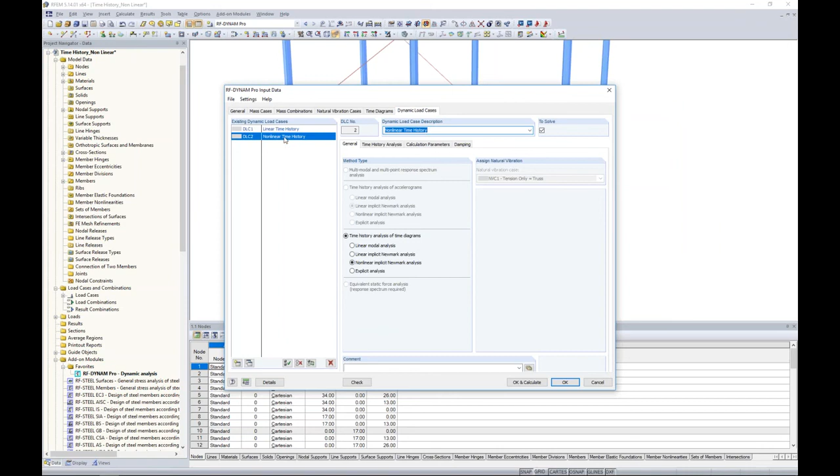Now, under the dynamic analysis module, jumping back to the dynamic load case here, I'm going to utilize the same nonlinear time history. Again, we can use the same solvers, we're using the same structure. I just have changed around the support condition a little bit. What I do want to do under the time history analysis, though, instead of 10 seconds for my total time, I only want to consider the first 2 seconds. We'll take a look at only the first 2 seconds for our results. So once this is done, I can click OK and calculate it.

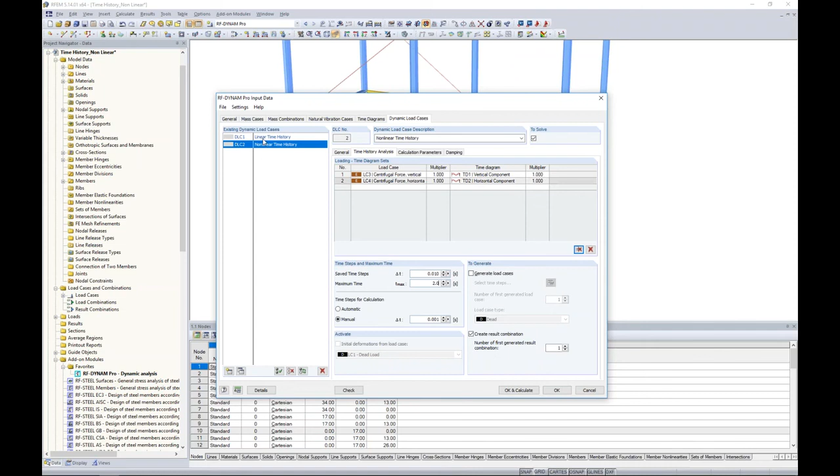Now, the one thing to check before we run our calculation, remember that I have the linear time history that I'm also solving for. Well, this is really just going to bog down my solution time. What's nice is that we have this feature here where we can uncheck it to solve. So all of my information is still there, I just don't have to go through the solution time if I'm really not interested in those results, but I can easily activate them again to resolve it.

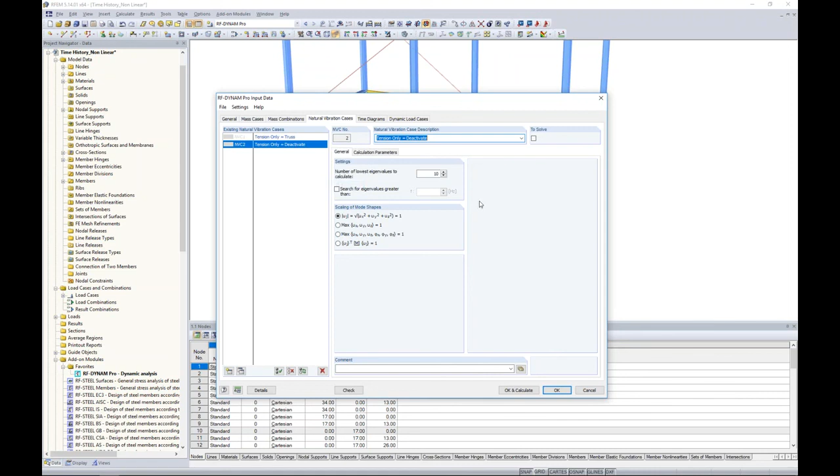Now, again, the natural vibration case, same scenario. We do not need a natural vibration case for the nonlinear time history. So if I'm really not interested in the natural frequencies and mode shapes of my structure, we can always deactivate the to-solve function here, and you can also right click and set not to solve. So now we click OK and calculate, and we're only going to cycle through our nonlinear time history. I have this saved as an additional model here. This is eventually what the program would present to us back in RFEM. We have our dynamic tables here for nonlinear time history.

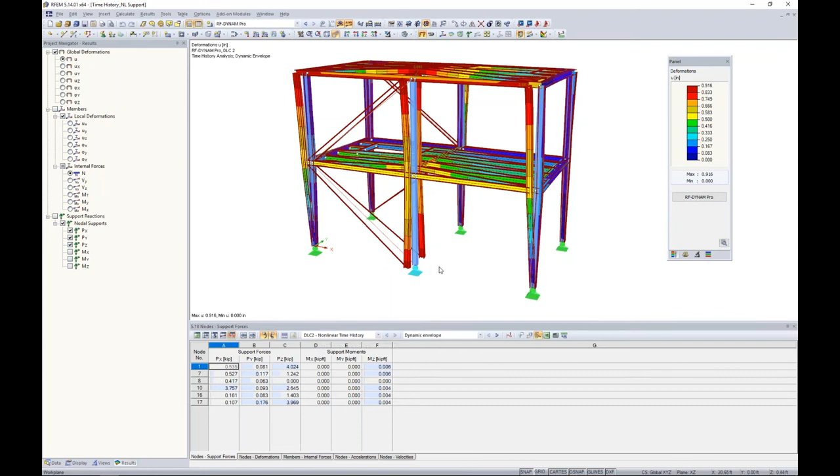This support condition looks a little different than what we previously saw. Utilizing our time course monitor, I think this is the best way to understand what's going on with the structure. Let's take a look at our third option here called support nodes. Now we only have 6 support nodes available. I'm going to take a look at support node number 8.

I have my big red arrow showing me exactly where that is within the model. And I'm going to look at the support forces in the vertical direction. Here is where you can see that we have no uplift forces, so that nonlinearity was completely accounted for with the nonlinear analysis.

At the beginning of the solution, the support condition here has failed. We have uplift, but then at about time 0.027, it looks like we have some type of downward force, so that support is reactivated. Then it fails again. At about time 0.354, it's activated again for a short period of time. Then for the duration of the 2 seconds, it's completely failed, most likely because we have uplift forces here.

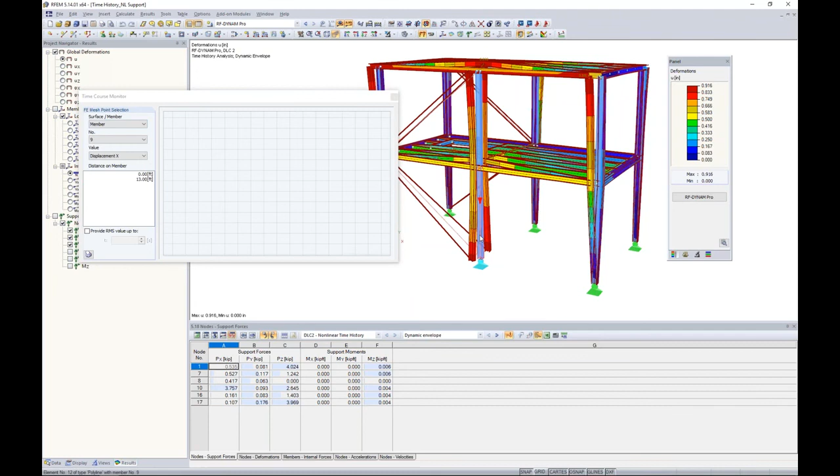The other way to tell what's going on is to take a look at our vertical deflection at the bottom of our column. What we can do here is set this to member. I can graphically choose this member here.

I'm going to look at displacements in the Z direction. We can see that at this beginning of time, this is where my support is activated, so I have no displacements in the vertical direction, but then my support fails and I have vertical deflection. For a brief moment in time, the support is activated again. Then for the rest of the 2-second duration, the support has completely failed.

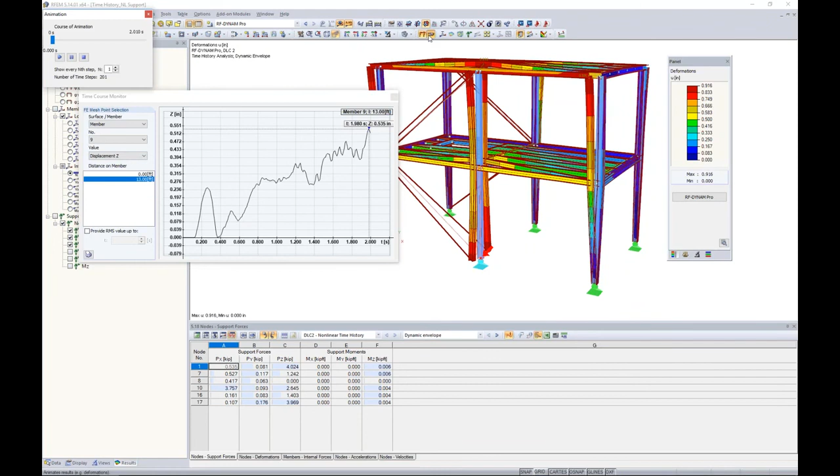What's also really beneficial with this time course monitor, and this is true for the linear analysis, nonlinear analysis, and any one of these options available within the results, we can view a nice little video here. Once I take a look at this video, it's going to cycle through this time course monitor, showing me exactly where I am. If we can even zoom in here, we can see the moment where our support condition completely fails.

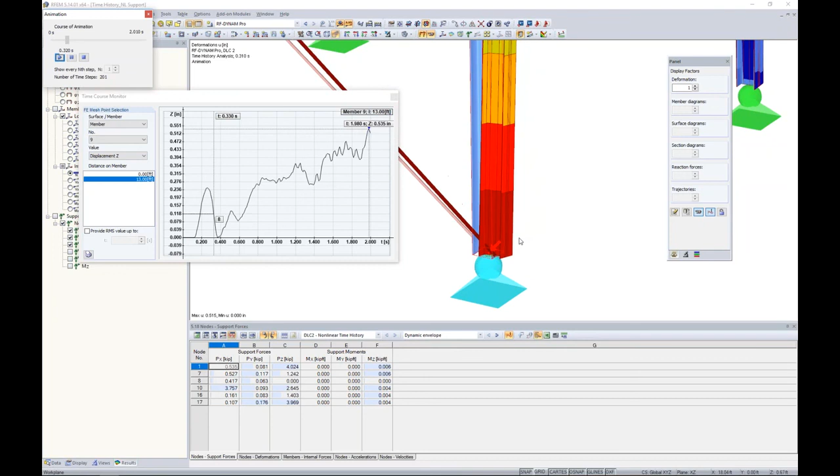As we cycle through this, there is a certain period of time coming up where that support is reactivated again, and we don't have any deflection. Then it fails again with uplift. So now our column is off floating somewhere.

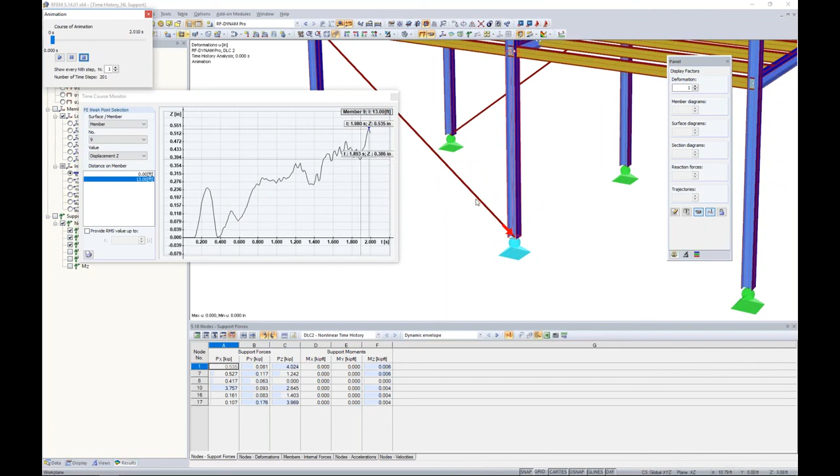Any one of these animations can be saved and exported out onto your computer, which is nice for presentations and to submit along with your calculation package. So that is just another example today of how a nonlinearity can be considered for our time history analysis.

Jumping back to the PowerPoint here, that concludes our webinar today.